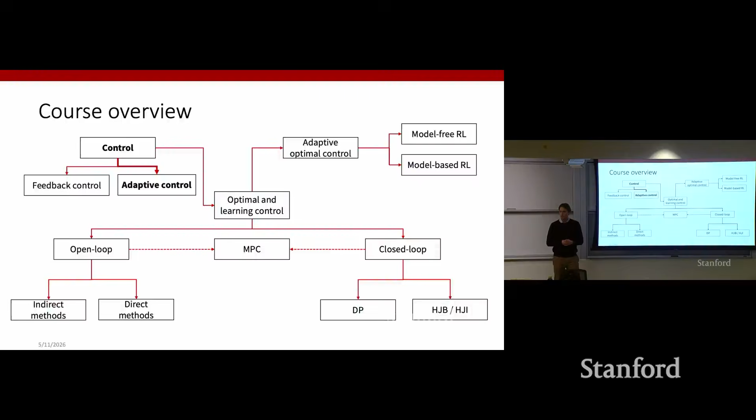Underlying all of these methods was the assumption that we knew how the dynamics behaved, that we had a good representation of our dynamics, which came from maybe an analytical expression or a differential equation. In the second part of this course, we relax these assumptions and move into the learning-based setting, where we assume we do not know in advance the dynamics of our models.

So specifically for today, we will first be transitioning into the learning-based setup, giving a rough idea of the kind of topics we'll be discussing. Then we will approach specifically the top left part of the quadrant, which relates to more classical ways of dealing with learning.

Specifically regarding system identification and adaptive control. We'll see two examples of adaptive control, namely MRAC, or Model Reference Adaptive Control, and MIAC, Model Identification Adaptive Control.

As a general setting, remember the framework we are in. Specifically, we look at controlling some system through the definition of a controller or a control law. In order to control the system, we may be measuring, having some sensors which measure the output of our system.

We might want to compare the measurements that come from our sensor with some reference we have in mind, that is an ideal behavior of our system that we would want it to execute. This will lead to the construction of our controller. So we have this feedback loop, which happens in closed loop.

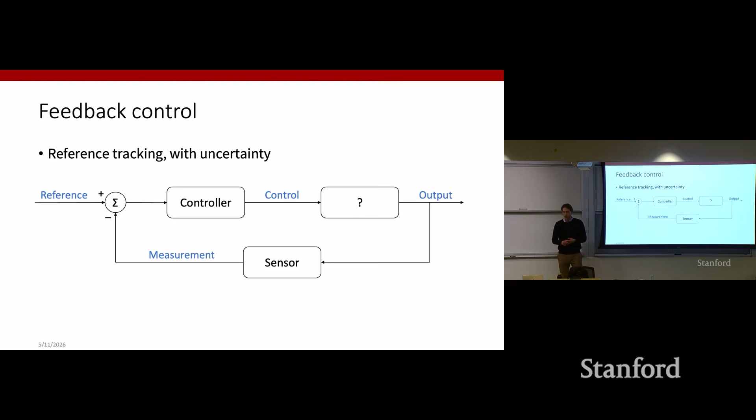However, the question is, what happens in the moment where we have some uncertainty or some unmodeled effects in how the system behaves? This is exactly the setting in which we'll be working on today and for the rest of this class.

So fundamentally, when looking at dealing with this kind of uncertainty that could be present in our system, how can we handle this? A simple approach could be that in many cases, uncertainties may have only a small effect.

For example, consider we're trying to fly a drone and we might have some unmodeled wind effects which are still pretty small. In this case, perhaps we don't really need to do anything too sophisticated about dealing with this uncertainty, but having a feedback controller may be just enough to compensate for these unmodeled effects.

This could be as simple as having some reference trajectory for our drone that we want to follow, and we might want to build a feedback controller that tracks this reference trajectory, for example through PID control. But again, we're in a system where we might have some unmodeled effects. If these are pretty small, then maybe feedback control is good enough.

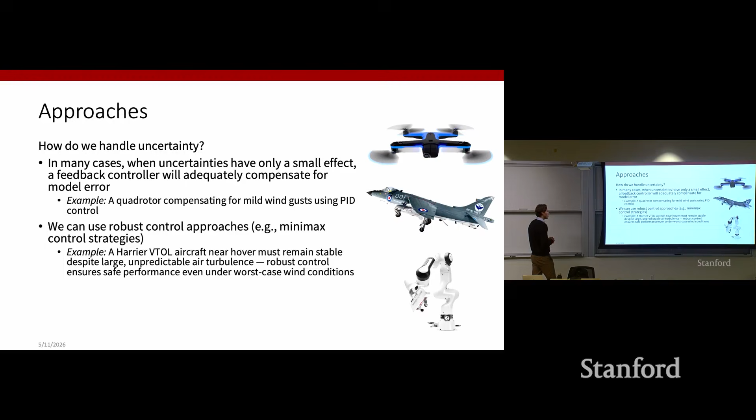A second approach is we could try to be a little bit more sophisticated and go into, for example, robust control approaches. We discussed this last week or a couple of weeks back, if you remember.

A min-max formulation where our goal was to maximize some measure of reward, which had a form like this: maximize with respect to our controls U, and we were assuming there was some distribution gamma, a set of distributions gamma, which were basically playing the role of the adversary, essentially modeling the worst case possible disturbance that could affect my system.

In class, we were looking at this relatively sadistic example of the homicidal chauffeur. But if we see this from the perspective of dealing with uncertainty, it is as if we're saying we have a system with some uncertainty which we cannot model. So let us be robust with respect to this uncertainty by reasoning with respect to the worst case scenario possible. Of course, this is great, but it could come with behavior that is potentially too defensive and too conservative. But again, this is a valid second high-level strategy of approaches.

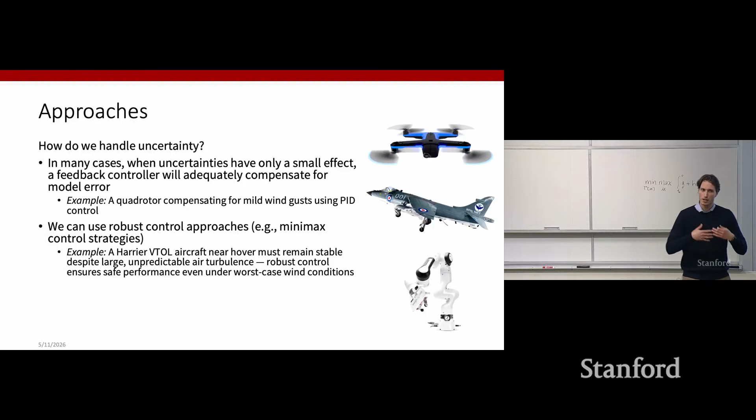The third one, which is also the one we'll be specifically focusing on today and for the remaining weeks, is the one where we have some uncertainty and we take into consideration the fact that we can collect examples of behavior and state transitions in our environment. Consider the case where we have our drone flying to accomplish some task. We might be storing logs of previous flights in order to observe these state transitions and use those to learn from data an approximate model of our dynamics. This is exactly the setting we'll be working with.

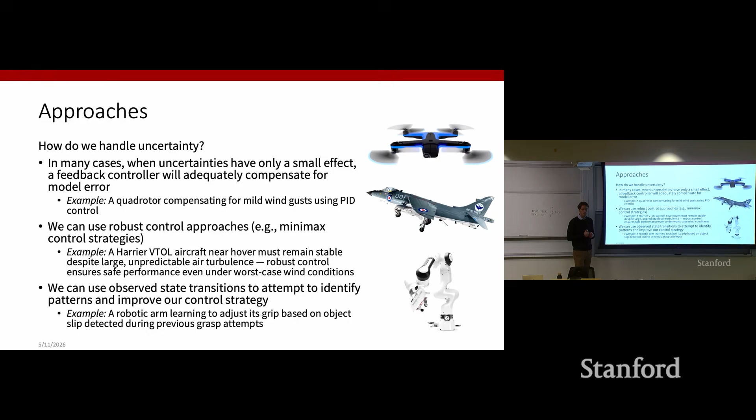I think this is a nice mental model to have, in the sense that whenever we have some uncertainty, we might be good enough with some feedback in order to correct for our unmodeled effects. We might want to be extremely conservative and reason about worst case scenarios, or we could use data-driven approaches that leverage pre-collected state transition observations in order to learn an approximate model of our dynamics. Any questions on these high-level and macro categories of methods?

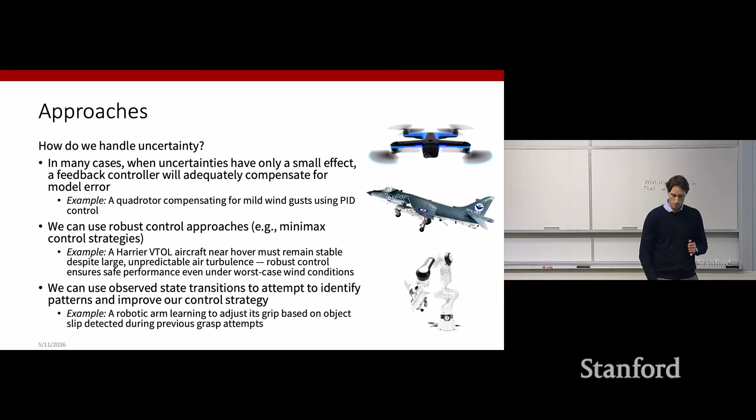So now we zoom into the third of these macro categories, that is data-driven methods, and the question that comes to mind is: okay, we say we want to learn something, but what can we learn? At a high level, different methods for learning-based control typically divide across two main families of approaches. In the first, we use measurements or collected episodes or transitions in order to directly improve the controller. On the other hand, we might want to use these measurements to learn an approximate model of our dynamics and then use this model to improve the controller. So in the second family, we have this intermediate objective, which is kind of system identification in a way, which is then a proxy to improve our overall controller.

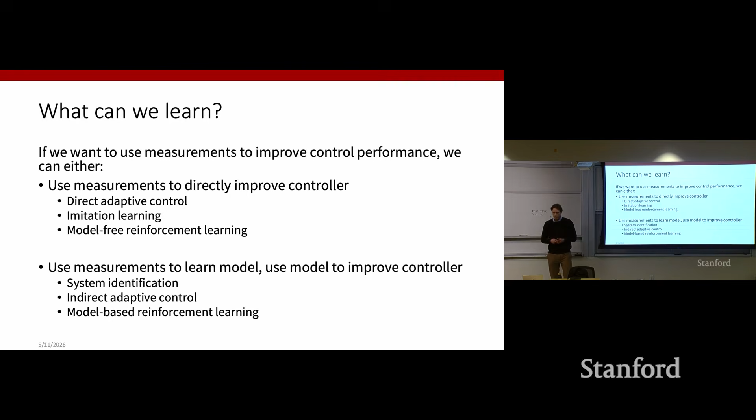The types of methods we'll see today and for the rest of this class loosely fall within these two buckets. Today we'll be focusing on direct adaptive control and indirect adaptive control, as well as system identification. But in the coming weeks, we'll also focus on imitation learning, as well as model-free and model-based reinforcement learning.

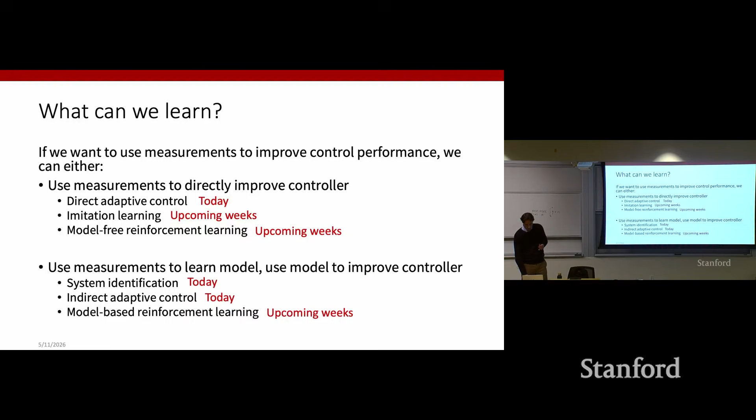As a second question that comes to mind: how does learning actually happen? Specifically, there are three prototypical cases. The first is the zero episodes case, also known as the system identification approach. The assumption here is that we have, in some way, pre-collected a data set of state transitions or rollouts of some policy controlling our system. We might want to use this offline data set to improve our controller, either by directly improving the controller, or by learning a model to then improve the controller.

What I want to stress is that this zero episodes case essentially entails having some mechanism of collecting a data set completely offline. Then we use this data set to estimate some parameters or some models in order to improve controller performance.

This is to be distinguished from the one episode case, where we want to have this adaptation and learning happening directly online, while we control the system. Taking our drone example again, say we have some quadrotor carrying a payload of unknown mass m. The one episode or online adaptation approach would mean we have no mechanism of estimating this mass m from previous flights, but it's something we have to estimate and adapt to online while we control the drone. So the goal would be, while controlling the drone, to estimate unknown parameters, such as the unknown mass of our payload.

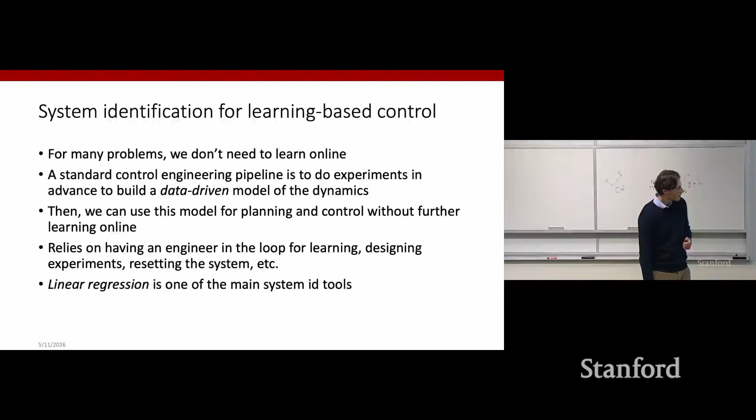The classical method for system identification is linear regression. I'm sure this will be repetition for most of you, but let's set the notation straight on learning through least squares minimization and linear regression in particular.

Specifically, we describe a setting where we assume we have some system model described as y equals theta transpose z plus some noise epsilon, where y is the output, z are some inputs, and theta are parameters which we wish to learn. We assume the process we wish to approximate is described by some inherent noise epsilon. We want to approximate the system through examples collected in a dataset D, which are tuples of input-output pairs, z, y, with i going from 1 to n data points. We use this dataset of input-output realizations, collected offline, to estimate an approximate model of our system.

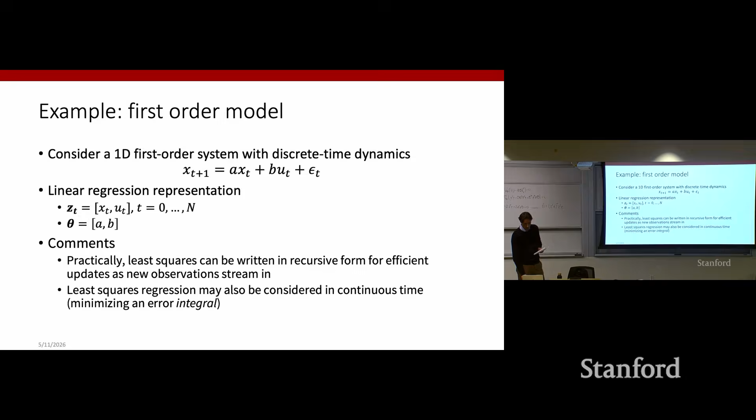So here are a couple of theoretical results you might be familiar with. The first is that this estimator turns out to be the best linear unbiased estimator for any noise distribution that obeys some common assumptions, specifically that the noise terms epsilon t are zero mean, uncorrelated, and all have the same finite variance. You might be familiar with this from your statistics classes.

And if the noise distribution is Gaussian specifically, then this estimator that we just derived is also known as the maximum likelihood estimator.

A question we might want to ask ourselves the moment we decide on this mechanism for estimating our unknown parameters is: what are sufficient conditions for which our estimator theta hat converges to the ground truth, the true parameters theta?

In other words, say we have an x-axis representing the amount of data we collect, and the y-axis representing our estimator theta hat. Consider a specific value for the ground truth value of our parameters theta star.

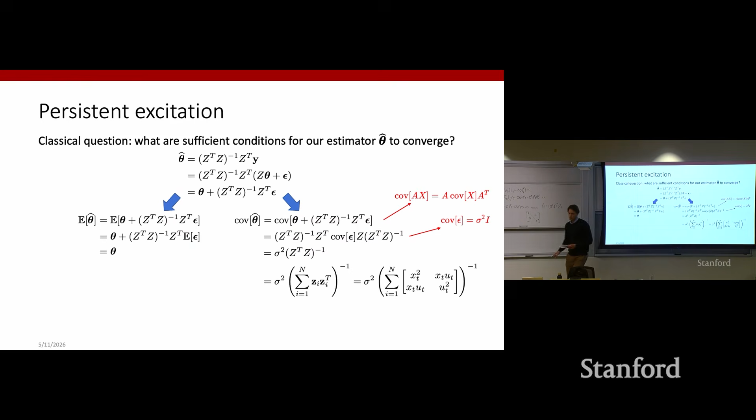So what we're saying is that, first of all, this is a neat result, in the sense that as long as our system operates forever and operates in a non-trivial way, meaning that the x's and u's that we observe are non-trivial, for example not just statically stuck at zero, then that summation will go to infinity, and so our covariance will go to zero.

So here, when I refer to the system operating non-trivially, what I mean is this characteristic known as persistent excitation, which essentially encodes the idea that we have to continuously probe the system in meaningful ways. And if we do so, then in the limit as n goes to infinity, our estimator will be exactly around the true value of theta.

Okay, any questions here? Yes. I was wondering, is there an intuition on why this is invertible enough as to work? Like, is there an intuition why this is invertible enough to be meaningful? What's a sufficient condition or something like that?

No, sure. So here we're kind of simplifying the treatment. There are complete derivations that will tell us when this is invertible. But this is just as a frame of reference, considering that our goal here is system dynamics and estimating these true parameters theta.

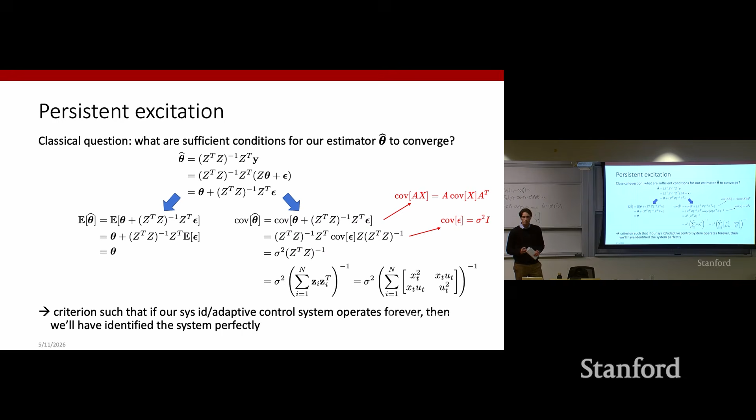Okay, and so in practice, system identification leads to a number of questions, right? We're describing this overall framework or paradigm where we want to approximate the system dynamics by learning from data. So some questions that could emerge are: what if we have a data budget? How much data is required to learn the model? Or how can we even quantify what good means in terms of parameter estimation?

And interestingly, we did all of these analyses from the perspective of a statistician wanting to analyze the performance or the behavior of an estimator of our parameters.

But in reality, what we care about is control performance, right? So we do not really care too much about model accuracy. What we care about is that we get a better controller out of this process.

And so, again, just to make a visual discussion here, consider a very extreme case where, depending on some parameter theta which we don't really know the exact value of, our control law would vary wildly. So say that if theta is negative, we would have one specific control that we have to take, and if theta is positive, we would have a different control. So a very stepwise control function depending on theta.

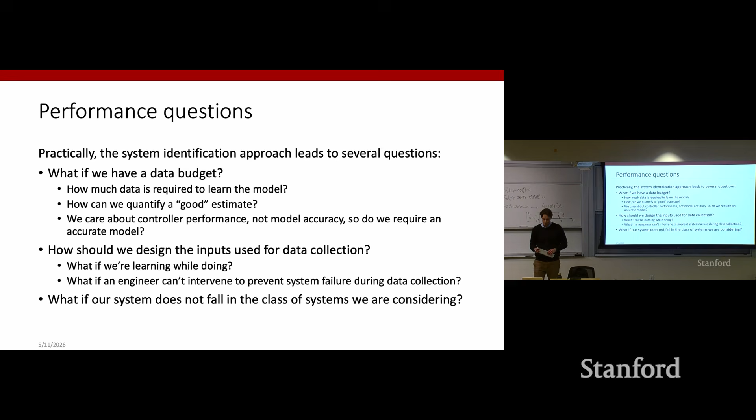Okay, any questions on system identification before we move on to adaptive control?

I mean, I guess the main idea here is pretty simple, right? So we want to estimate a model from data and then use this potentially to improve our controller later on.

Okay, but so let's move to adaptive control. And if system identification was essentially lying in this zero-episode setting, where we had this data and we wanted to use this data to estimate a model of our dynamics, adaptive control falls into this one-episode setting, whereby we want to improve our control essentially through online adaptation in real time as we operate the system. And so this can be done, again as we were saying before, by either directly improving the controller or by first learning a model and then using this model to improve the controller.

And this is what differentiates between model reference adaptive control, which essentially falls in the first category, where, as we will see, we're directly improving the controller, or model identification adaptive control—notice identification also in the name—which falls under the second category, where we are first estimating a model and then using this to improve the controller performance.

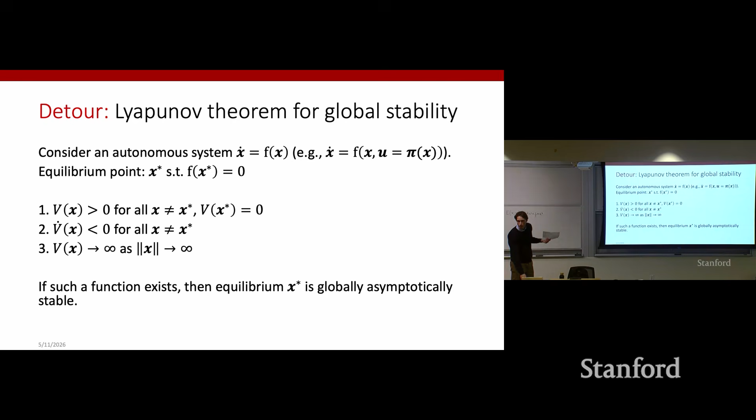So we'll focus on our analysis on proving the second of the 3 conditions, that is, the derivative of our function, in this case the energy function, is negative for all points that are not the equilibrium. So let us do this. Let's compute the derivative of the energy function, E dot, which is equal to k x x dot plus m x dot x double dot.

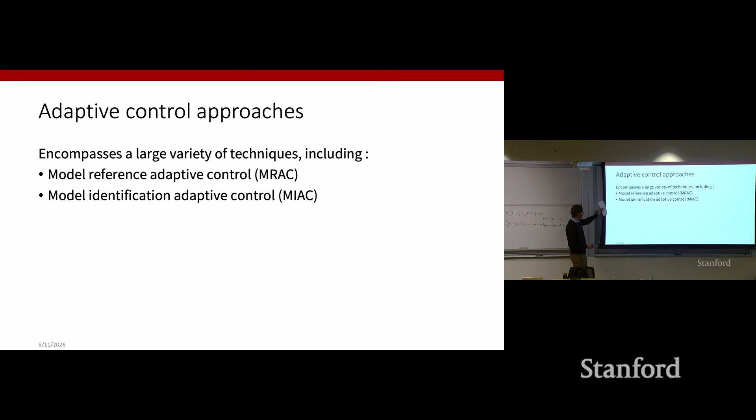In model reference adaptive control, we essentially will be defining 4 key elements or parts. The first one will be a plant containing unknown parameters. The plant here is a very specific word, but just let's consider the system, where we have some unknown parameters.

We will be defining a reference model, which essentially compactly specifies the desired output that we would want to have from our system. In a way, the reference model can be seen as an alternative way to specify performance. We are not really measuring performance through the lens of a metric or objective function we wish to optimize, but from the perspective of measuring distance with respect to a reference signal.

The third element is that we will have a feedback control law that contains some adjustable parameters. So we will be coming up with a control mechanism or control policy which depends on some parameters which are adjustable. And in particular, we will be adjusting these parameters according to an adaptation mechanism, which we will be tasked with coming up with.

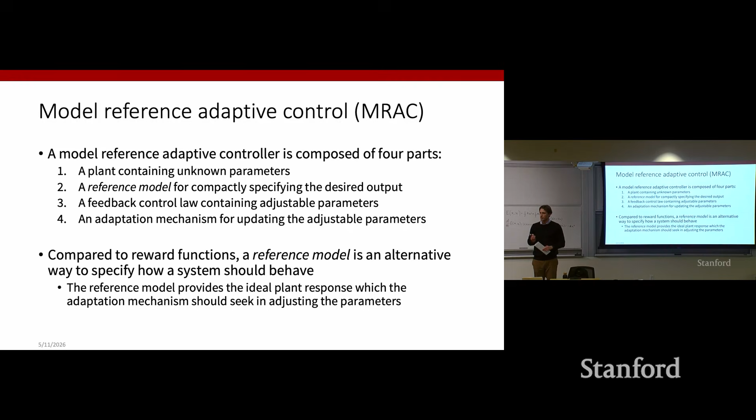Any question on the setting? Okay, great.

So now we will be going through an example of the kind of analysis that we might be doing in adaptive control. We will first set up the stage in a setting where everything is known, so we'll just do the analysis when we don't have unknown parameters and adaptation mechanisms. Then we will take that same example, but now add this adjusting component and repeat the analysis.

Okay, but as a frame of reference, remember that in adaptive control, we care about measuring the stability of the coupled system: controller, adaptation mechanism, system. So this coupled system, and in general, we will be defining our 4 ingredients.

So we'll have a system which might have some unknown parameters. In this case, we consider a double integrator system. So for us, the system will be m x double dot equals u.

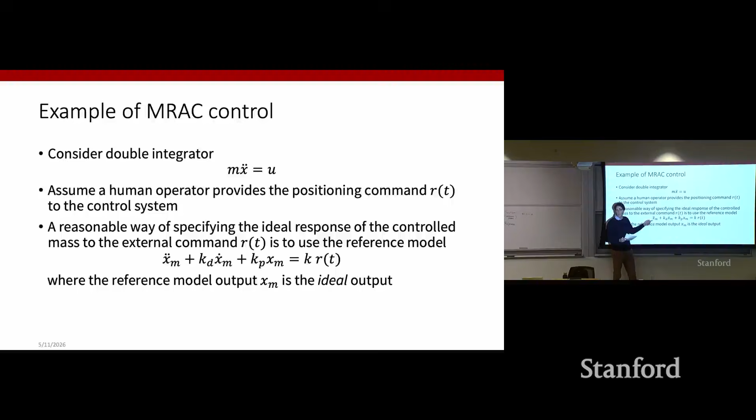So we assume we have someone giving us positioning command r of t, and we come up with this ideal response of the controlled mass, which we assume evolves according to this differential equation. So we're introducing this fictitious x sub m, and we hypothesize that our system will evolve according to this reference model. So x sub m stands for model.

Specifically, our reference will be xm double dot plus kd xm dot plus kp xm equals kr of t. So x sub m will be our ideal output. The various k's here are just gains we can choose as a system designer, and we assume that r is a positioning command that is given to us.

Okay, so now we assume that the mass is known exactly. And we can basically state the fact that if the mass is known exactly, we know that we can achieve perfect tracking of our reference model through that control law.

So the control law specifically is that u is equal to m times xm double dot minus 2 lambda x tilde dot minus lambda squared x tilde, where we denote x tilde as the difference between the output of the actual system and the reference, the ideal output we would want from the system. So if we want the tracking error.

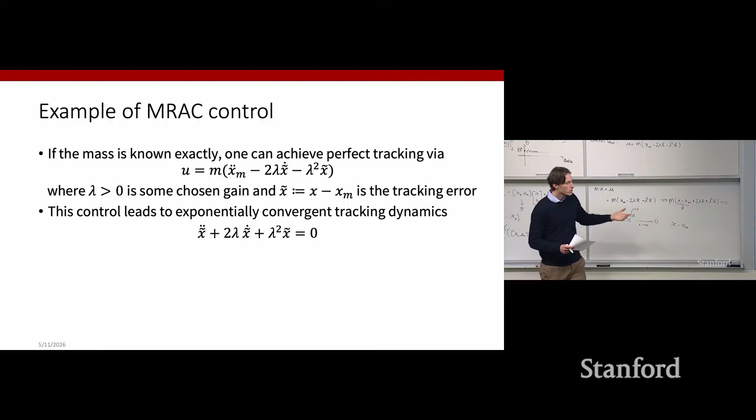So this was basically the overall setting: we hypothesized the mass m was known, and we showed this control law guaranteed convergence to zero tracking error, motivated by this analysis. Now we go into the setting that we actually care about, where we assume the mass is not known exactly. Everything stays the same, but now we're in the more realistic setting where the mass is not known, and so we will have an estimate for the mass, m hat.

Okay, so now let us once again derive the closed loop dynamics of this combined system. To do this, let's make some definitions for notational compactness. We define S as x tilde dot plus lambda x tilde. We define nu as xm double dot minus 2 lambda x tilde dot minus lambda squared x tilde. And we define m tilde as the estimation error, m hat minus m.

Given these definitions, let us do the exact same analysis as before: we derive the closed loop dynamics of this combined system. We start from our dynamics, m x double dot equals u. We know what u is because we defined it, but this time u is a function of the unknown mass estimate m hat. So m hat times xm double dot minus 2 lambda x tilde dot minus lambda squared x tilde—this is nu. And so we get m tilde nu plus m nu.

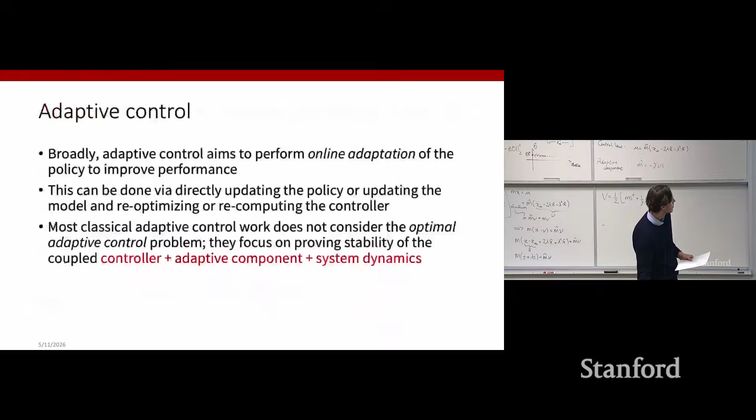That is that the derivative of this Lyapunov function, v dot, has to be negative for all points that are not the equilibrium. So we'll be computing the derivative v dot, which is equal to m s s dot plus 1 over gamma m tilde m tilde dot. Here we use the fact that m tilde, as we defined it, is equal to m hat minus m. But because m is a fixed mass, so it's a constant, from this we can say that m tilde dot is equal to m hat dot.

And so what we get is m s times s dot plus 1 over gamma m tilde times m hat dot, which is equal to m s s dot minus 1 over gamma times m tilde gamma nu s. Here we just used the fact that m hat dot is equal to negative gamma nu s, according to how we defined the adaptation component.

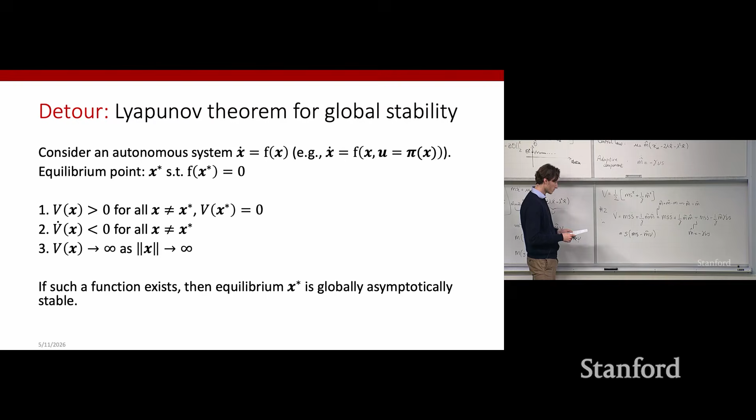And so what this is saying is that since we have done this Lyapunov stability analysis given this candidate Lyapunov function, what we can say is that S goes to 0, because we are considering this as our candidate equilibrium point.

So S goes to 0, and remember how we defined S, which is x tilde dot plus lambda x tilde. What we're basically saying is that we have shown that this quantity goes to 0, which means that x tilde dot is equal to negative lambda x tilde, where lambda is positive. Remember that lambda is positive.

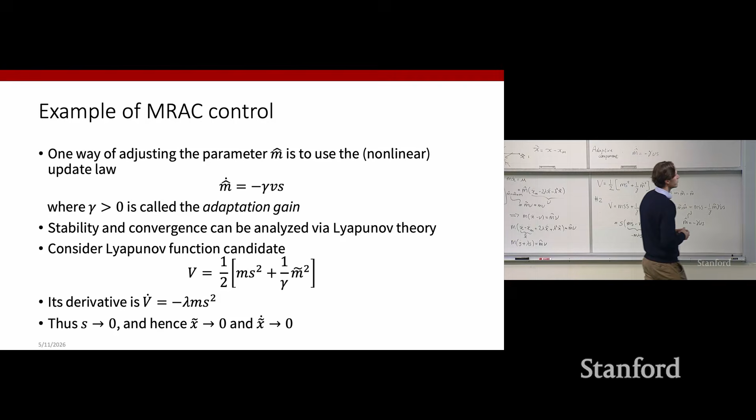The reality is that if you have an interesting system and you derive a Lyapunov function and show that the system is stable, you write a paper about it and you're happy about it. So this is something that's extremely case-dependent. We won't go into it.